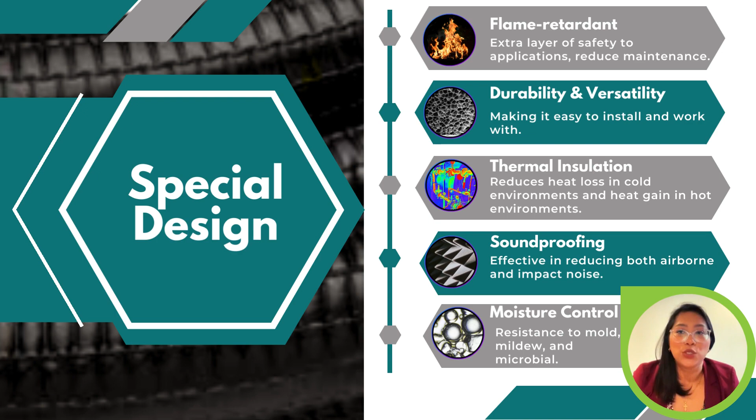For the next slide, it will be discussed by Catalina. Good morning, everyone. We will talk now about some components that can be added to the mix when we are working with polymeric foam, since there are different kinds of polymeric foam because they are used for specific industries. We can see the polystyrene foam, the polypropylene foam, polyurethane foam, the PVC foam, and polyethylene foam.

For our application in heating, ventilation, air conditioning, and refrigeration, we are also using the polyethylene foam or the polypropylene foam. Both could be used as they share the same properties such as high strength-to-weight ratio, impact resistance, and chemical resistance, and have applications in automotive components and packaging materials, insulation, protective cases, and construction.

In K-Mold division, that is a division inside the Great Lakes company that is specialized in this area of heating, ventilation, air conditioning. They assemble and process the Easy Roll Plus Black product that is our product for this presentation. In black coating, the component used is the polyethylene foam, as I said before, which meets the requirement characteristics such as resistance to tear wherever it's installed.

The black coating also features UV and moisture resistance, ensuring against thermal losses and providing longevity when in direct contact with sunlight and UV rays. These are necessary characteristics to fulfill the purpose of installation in mini-split air conditioning and heating systems. We emphasize the importance of this component in the installation of the piping or air condensation system to ensure thermal insulation and thus minimize energy losses.

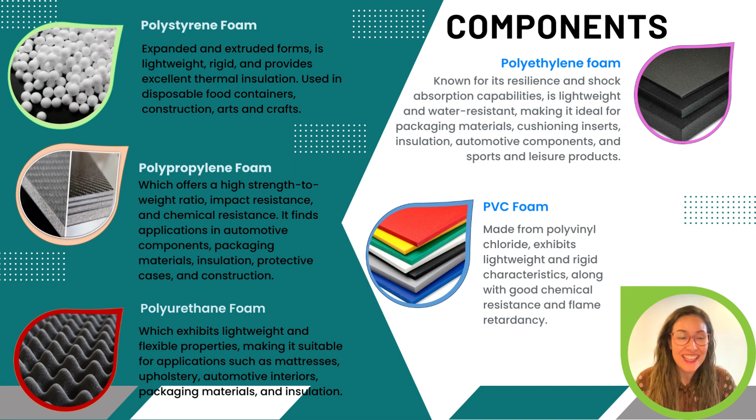Polymeric foam can be categorized into different types based on its cellular structure, one of which is open cellular foam, which has interconnected pores or cells suitable for filtration applications. Closed cellular foam does not have interconnected pores or cells, often used for buoyancy or flotation applications. Flexible foam can bend, flex, or absorb impacts without cracking or delaminating.

Rigid foam features a matrix with little or no flexibility. Reticular foam has a very open structure with an interconnecting network of thin materials. Syntactic foam consists of rigid microspheres or glass microballoons held together by a plastic or resin matrix.

With the foam materials, polymeric foam can be made in various ways, such as plastics, elastomers, thermoset resins, thermoplastics, and other materials. For particular plastics, such as acrylonitrile butadiene styrene (ABS), polycarbonate, polyethylene, polypropylene, and with elastomers such as silicones, polyurethane, neoprene, and etc.

And with the thermoset resins used for casting and molding applications. For the thermoplastics, materials can be melted and reformed multiple times, while other materials that have been used are metal alloy, ceramic, and a lot more.

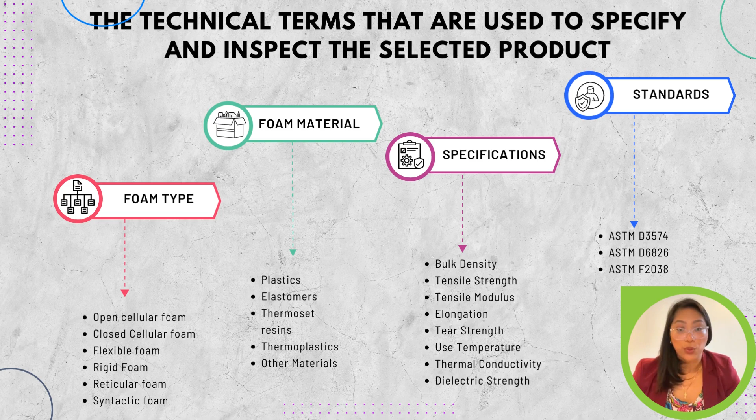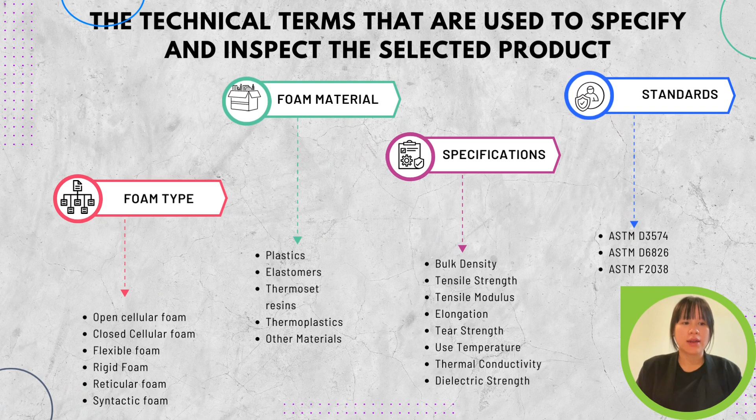Here's my colleague Thick to discuss the specification and standards of the polymer. Hello everyone, my name is T, and here are some important specifications used to evaluate polymeric foam, including bulk density, tensile strength, tensile modulus, elongation, tear strength, use temperature, thermal conductivity, and dielectric strength. Bulk density is the density of the foam material.

Tensile strength is the maximum strength the foam can withstand under tension. Tensile modulus is the measure of stiffness or rigidity of the foam. Elongation is the percent deformation occurring during a tensile test. Tear strength is resistance to tearing forces. Use temperature is the temperature range within which the foam can perform effectively.

Thermal conductivity is the ability of the foam to conduct heat, and dielectric strength is the maximum voltage field the foam can withstand before electrical breakdown.

Various standards exist for testing and evaluating foams and foam materials. These include ASTM D3574, a standard test method for flexible cellular materials like slab, bonded, and molded urethane foams. ASTM D6826 is a standard specification for sprayed slurries, foams and indigenous materials, used as alternative daily cover for municipal solid waste landfills. Finally, ASTM F2038 is a standard guide for silicone elastomers, gels, and foams used in medical applications.

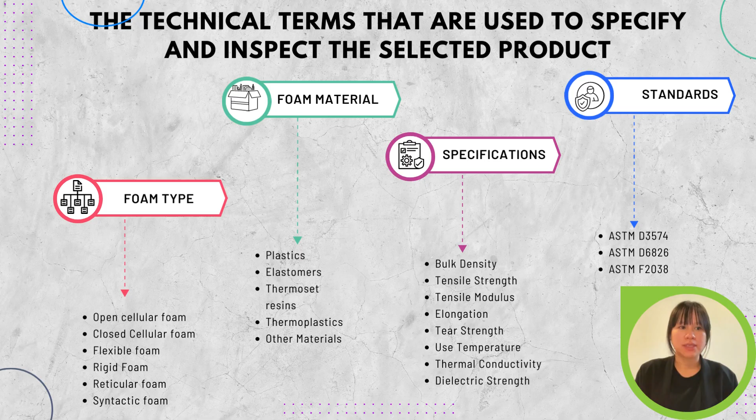Part 1: formulations and uncured materials. Next, I will continue to present about the suppliers for polymeric foam.

When it comes to the international supply of polymeric foam, there are several notable suppliers in the market. We list out three of them. Vertec Polymers is an international supplier of polymeric foam based in the United States. They offer a wide range of foam products, including polyurethane, polyethylene, and polypropylene foams, catering to various industries such as automotive, construction, and packaging. American Foam Products is another prominent international supplier, also based in the United States. They specialize in providing high-quality polymeric foam solutions for diverse applications, including cushioning, insulation, and sound absorption.

The final international supplier is Wisconsin Foam Products, a well-established supplier of polymeric foam based in the United States. They offer an extensive selection of foam materials, including polyurethane, polystyrene, and polyethylene foams, serving industries such as medical, aerospace, and consumer goods.

Besides international suppliers, there are also domestic suppliers of polymeric foam in Canada: Genyk Canada, Polymer Interfaces, and KristoFoam Industries. Genyk Canada is a prominent domestic supplier of polymeric foam in Canada. They provide a range of foam products, including polyurethane and polyethylene foam, for applications such as insulation, packaging, and construction.

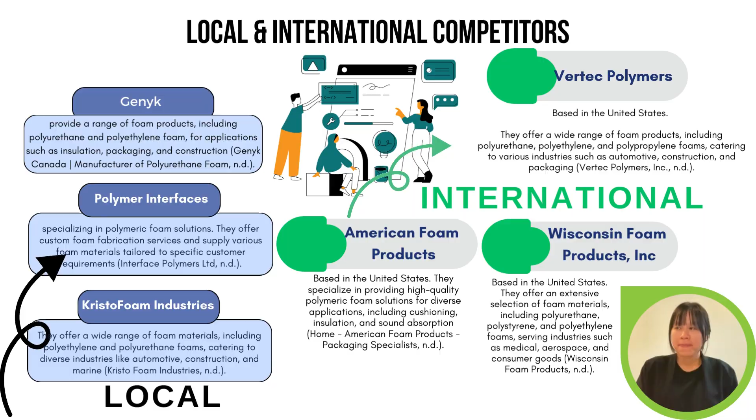There are common packages and ways of shipping the polymers, such as blocks or sheets. These blocks or sheets are typically stacked and secured on pallets for ease of handling and transportation. We also have customized shapes, which are often packaged in boxes or containers that provide additional protection during shipping.

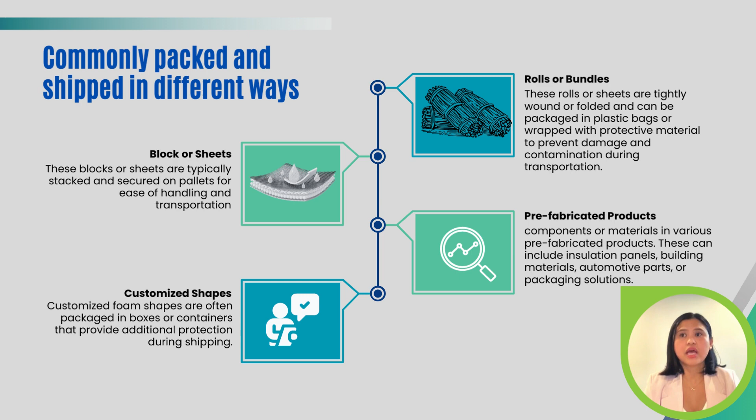We also have rolls or bundles. These rolls or sheets are tightly wound or folded and can be packaged in plastic bags or wrapped with protective material to prevent damage and contamination during transportation. We also have prefabricated products, components or materials in various prefabricated forms, which can include insulation panels, building materials, automotive parts, or packaging solutions.

Okay, so that's it for the pricing trend, and the next slide will be discussed by all the team members. Let's discuss the factors that affected our main commodity.